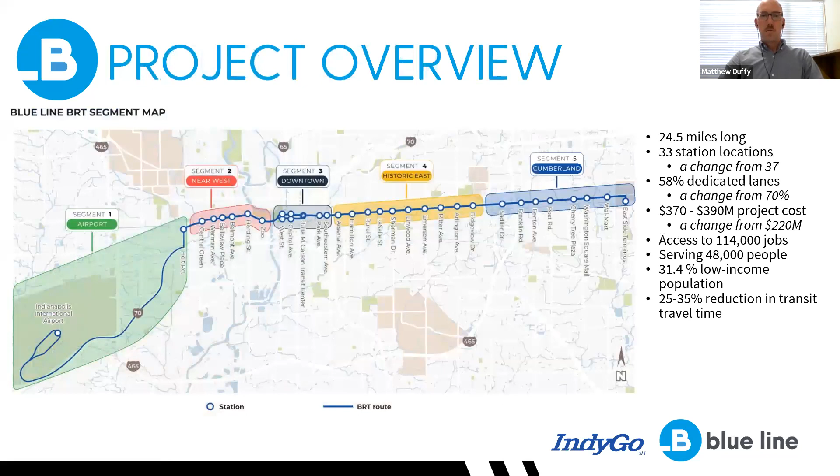Station details - 33 new BRT stations. The stations are very similar to the Red and Purple Line BRT stations. We made some small changes to the Purple Line stations, which haven't quite taken shape yet if you've seen the 38th Street corridor, but are about to. Really small, minor changes to some of the material selection, but overall look and feel will be the same. Covered waiting area, level boarding, ticket vending machines, real-time arrival signs, security cameras, snow melts, and of course ADA accessible.

Stations are spaced about every half mile apart, and all stations along the project, with the exception of the western terminus at the airport, the eastern terminus which is off-street adjacent to the Meijer, and the downtown transit center, will be center-running, except for the Washington and Maryland one-way pairs, which will be curbside because those are on existing one-way streets.

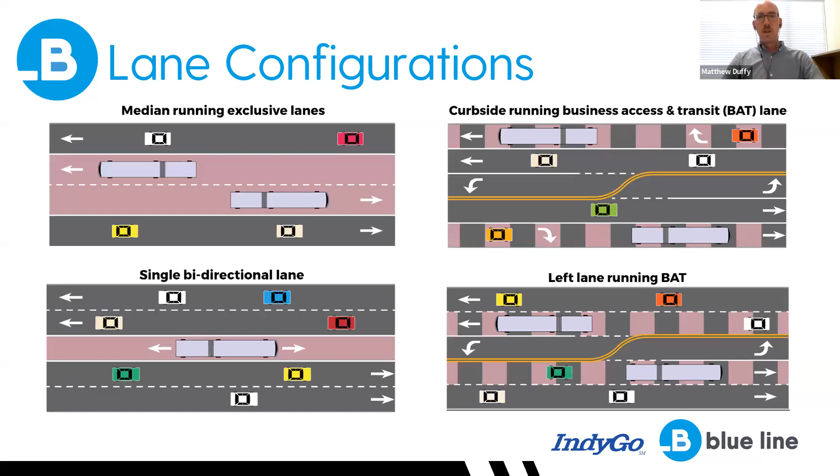Top right is curbside BAT - that's where a bus uses the right lane that can go straight through, or right-turning vehicles can use it to access driveways or cross streets. It's known as a BAT, which stands for Business Access Transit, or bus and turns. The bottom right picture is the left lane running BAT, very similar to right lane BAT, except you're just flipping which lane is used. In the left lane configuration, drivers can move through the bus lane and then into the left turn lane in order to make a turn.

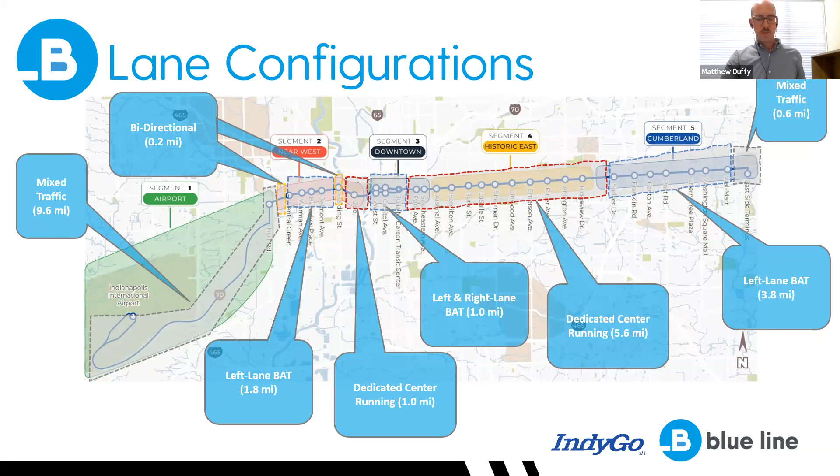Segment 1. So I mentioned the change from Washington Street. The lane configuration is mostly mixed traffic, all mixed traffic until you get onto Washington Street, going from the airport, taking the access roads to I-70, exiting at Holt Road, and going up to Washington Street.

So why the change? There are several reasons, and I think they all point to using I-70. First, it reduces the upfront capital cost of the project in an area that had probably the lowest transit usage and transit-beneficial land uses.

It reduced quite a bit of capital upfront cost on the project and allowed us to maintain using the same FTA grant being pursued. It also reduces operating costs, both annually and in the number of vehicles required, which ties back to the capital cost of the vehicles needed to operate this segment.

It also provides faster service to the airport, which I think is a goal everyone shares, to be able to move visitors and other people that live in the city to and from downtown and other parts of the city.

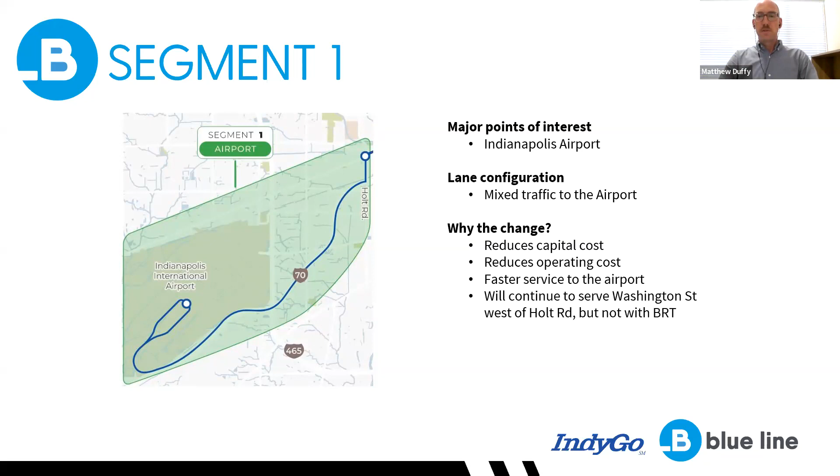Next slide, please. Segment 2, again, this is the portion from Holt Road essentially to the White River. It utilizes left lane running BAT configuration, which provides a benefit between transit service and maintaining existing access to properties and residences between the dedicated U-turn locations, and bidirectional configuration underneath the railroad bridges where we've got a pinch down between those existing bridge abutments.

Some of the outreach takeaways: working with the Central Green development on property station location, the Indianapolis Zoo and how to access the zoo property with the station siting, and then some traffic impacts at Harding and White River. Next slide, please.

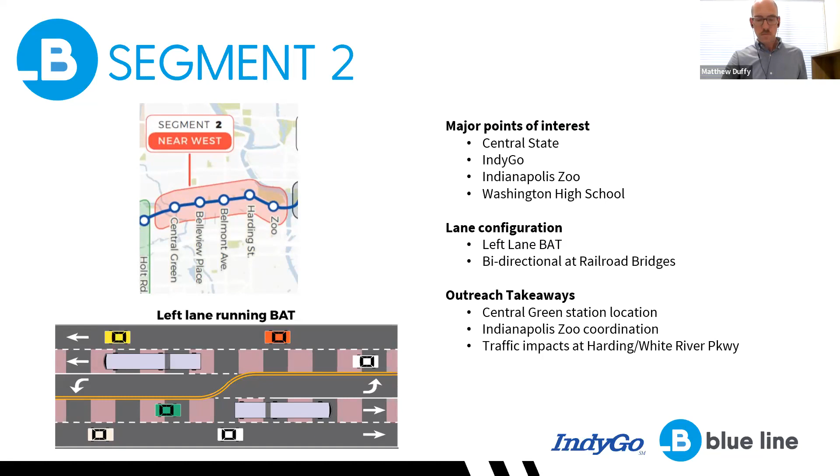Segment 3, downtown, mostly operating on the one-way pairs of Washington and Maryland, with left lane and right lane BAT and a little bit of mixed traffic. Some outreach takeaways here: working on station siting near the Eiteljorg, and then the station location was shifted from East Street over to Park.

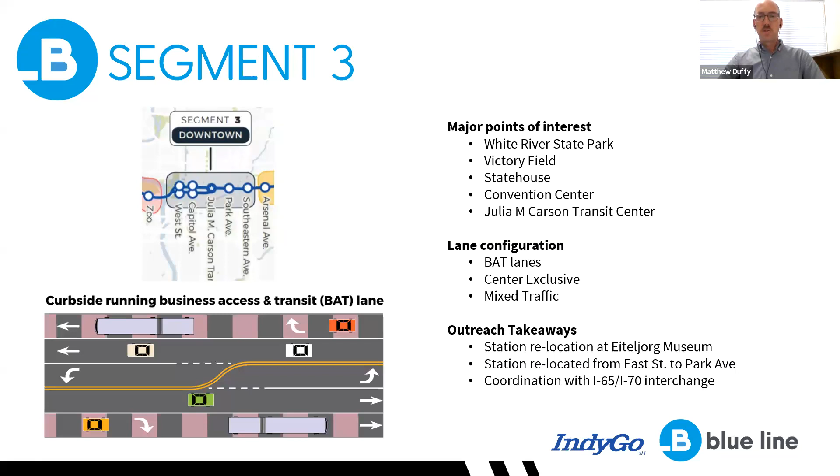That's kind of an older change that was pre-60%, but still worth mentioning again. And then coordination with I-65 and I-70 as part of the North Split project, and lastly coordinating with the Elevator Hill development as well with the Southeastern station. Next slide, please.

Segment 4, median running exclusive lanes. Bus lane in each direction on the inside, and then general traffic on the outside, utilizing signalized access points to turn around in between those points.

We've looked at the distances for U-turns here and added signals in some locations, which also serves as a benefit to provide pedestrian crossings between signalized and other pedestrian crossing locations. We know that pedestrian safety is incredibly important here and on all streets really, but that's a focus as design develops.

We're working on preserving the Irvington streetscape where that exists, coordinating with the Shepherd Center on access to that property, and then working to avoid historic property impacts throughout this part of the project.

As far as traffic congestion goes, there have been several intersections where we worked with the city to agree on improvements to meet the traffic metrics set forth as part of the project for level of service, which is a term for traffic analysis. We've worked through those specific intersections on remedying those concerns.

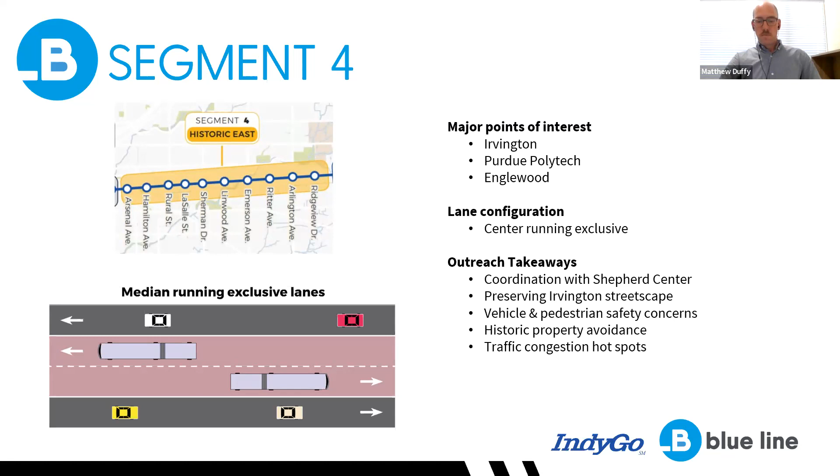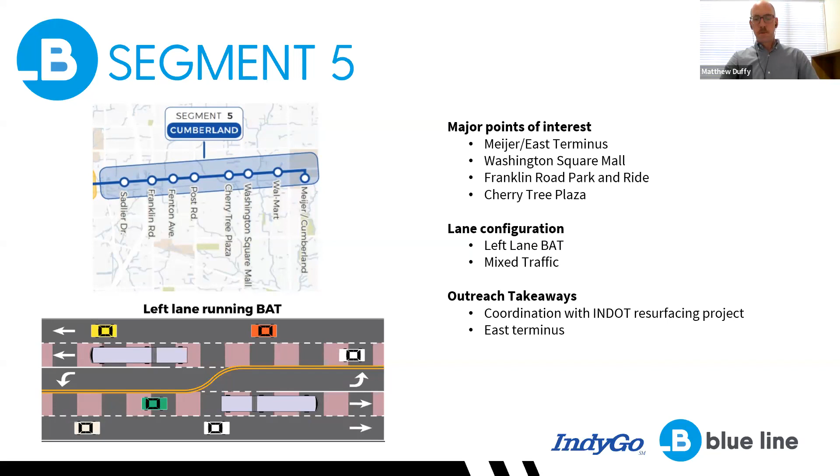Now I'm going to talk about some of the details, the big cost drivers that allowed us to bring this project back into a possibility, I guess. The first one is the decision to switch from electric buses to diesel hybrid buses.

There was federal legislation passed in 2021 that restricted the purchase of BYD all-electric buses with federal money. Again, those are the buses that were purchased and utilized on the Red Line and will be utilized on the Purple Line as well.

The other alternative for an electric bus is another vendor that has significantly lower range, and even more problematic is the size of this corridor, which meant we had to purchase essentially twice as many buses to operate it, which put the costs up at upwards of $130 million.

Projecting the shift to diesel hybrid will cost around $35 million. This still allows IndyGo to reach clean fleet goals, lowering carbon footprint, still aligns with the Small Starts Grant Agreement, and we also can eliminate the capital cost of putting in inductive charging as part of the project. All that being said, I think it would still be IndyGo's goal to investigate a zero-emission vehicle option at some point in the future.

Budget and funding. On the funding side, we're pursuing an FTA Small Starts grant, requesting $150 million, which is the most that you can request for the Small Starts grant.

Other federal grants are about $36 million, and the rest of the project is funded locally, $185.5 million. Project budget is $370 to $390 million.

I've broken it down into some key categories: infrastructure, $238 million, which includes pavement, all the pedestrian improvements we mentioned, traffic signals, and stormwater. Stations, BRT stations, are $51 million, vehicles $30 million, and project development costs, right-of-way and finance, are about $50 million.

The reason we're leaving a range of 370 to 390 is because we're updating cost estimates as we move forward. We're still refining the design, still moving it forward so that some of the uncertainties can translate into knowns, and we can narrow in on what a proposed project cost might be.

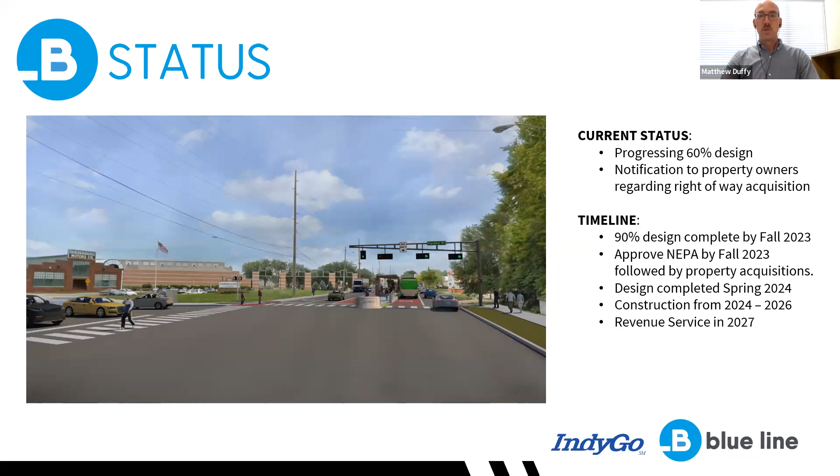The property acquisition process overall has started now, although the actual offers cannot happen until NEPA is approved. So the process has started, but offers have not been made yet.

There are two different kinds of acquisitions, temporary and permanent. Temporary is only needed for a short time to build whatever infrastructure is adjacent to it, so sometimes it's a sidewalk or something, then grading back to wherever the property meets. Permanent is where you've got the purchase of private property for permanent public use. So the difference is temporary turns back over to the property owner at the end of the project, and permanent, the property turns over to the public entity.

For the blue line, impacted property owners should be receiving a letter prior to appraisal starting, with contact information to discuss the process. We've got a project team available to discuss in further detail if needed, and you can always reach out to us one-on-one if you have a property you're interested in or wondering about status. Next slide, please.

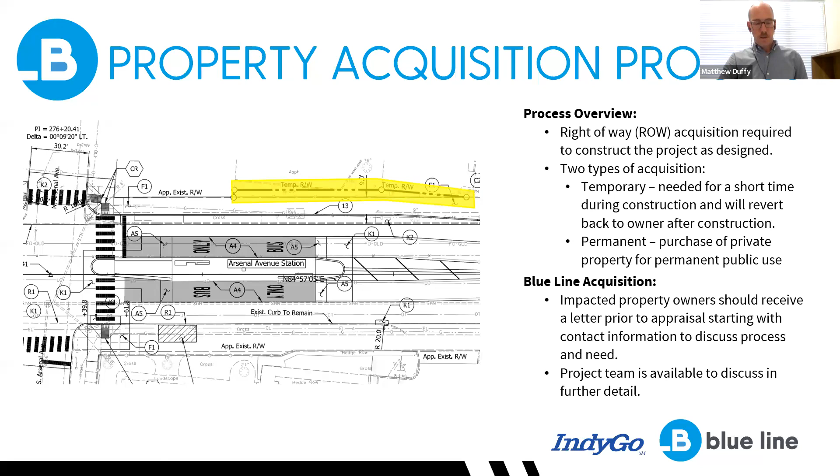Next steps for the project: I mentioned 90% design plans, that's the big push right now. We're also progressing NEPA, which is another critical step on the project. We'll continue to coordinate with partner agencies and progress the design of all the infrastructure elements I mentioned.

We'll be updating the cost estimate as well, which will come in with the 90% submittal. And some of the details about construction are really what need to be figured out next and then communicated out.

Construction phasing, schedule, and traffic impacts, we don't know yet. I mentioned 2024 to 2026, but we don't know what part of the project will get constructed when, what construction phasing will look like, and access during construction — all really important critical steps of this project that we'll be figuring out and communicating to everybody.

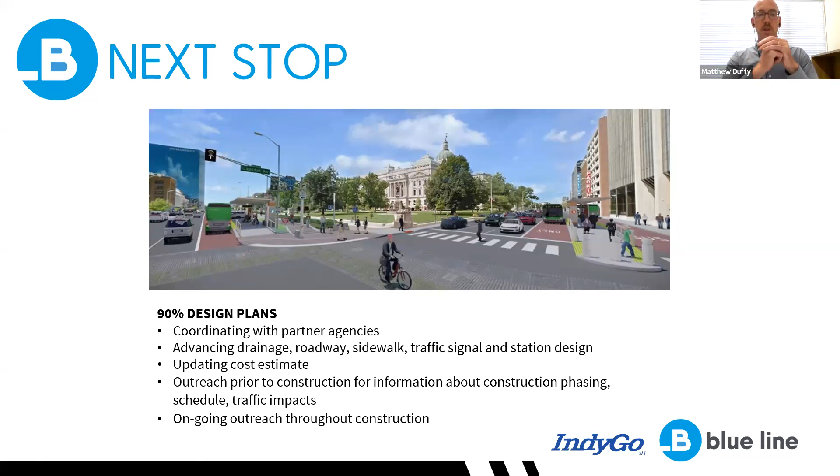So again, ongoing through construction, we'll be making sure to update the community as construction progresses. Next slide, please.

Continued feedback: there are opportunities this week for open houses, and I think Jordan's got that on the next slide here. One-on-one meetings as requested are always open to discuss the project as needed and provide information as possible.

We're looking for feedback on individual property or access and circulation — those are great areas of feedback and ways we can incorporate that into the design, or just work with you to understand what the built conditions will look like, and how we can provide positive impacts to businesses during construction itself.

For the overall layout of the project, station locations, and where dedicated lanes are, those are considered finalized at this point, and we're moving forward with those in the proposed design.

Next slide, please. Thank you, Matt. I'll actually talk about how everyone can stay engaged with this project. Matt just shared with us the feedback we are looking for. This was largely an informational meeting, but we will have some opportunities this week if you want to have one-on-one conversations, view the design plans, or provide some feedback.